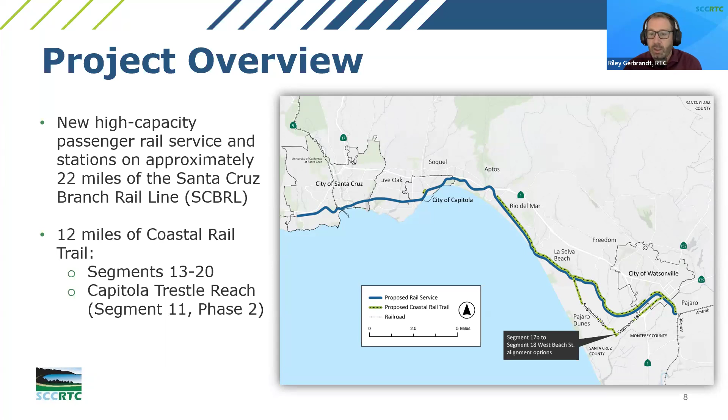And on your screen there is a project study area showing the alignment and study area of the passenger rail service in dark blue and the Coastal Rail Trail new segments in green with the dashed line. Next slide.

So far, we have completed 3 of the project milestones, and we're approaching milestone number 4, which is the draft concept report and preliminary cost estimates and next steps for project development. We have pushed out milestone 4 to have the main components complete in summer of 2025 and the final concept report adopted in the fall of 2025. Next slide.

And we wanted to start off tonight's webinar with a brief review of some of the key actions that have happened recently. One of the key actions that the project team and the commission has taken in recent months has been looking at the project funding outlook. In the March 20th item at the RTC Commission meeting, there was a commission action to align the zero emission passenger rail and trail project with the state rail plan, and I'll get to that in the next slide.

But funding for a capital project like the zero emission passenger rail project involves a combination of federal, state, and local funding sources. And generally, a project like this, almost to a T, will require multiple funding sources to be able to complete the environmental analysis, preliminary engineering, right-of-way, final engineering and construction, as well as fund the operations and maintenance of the project once complete.

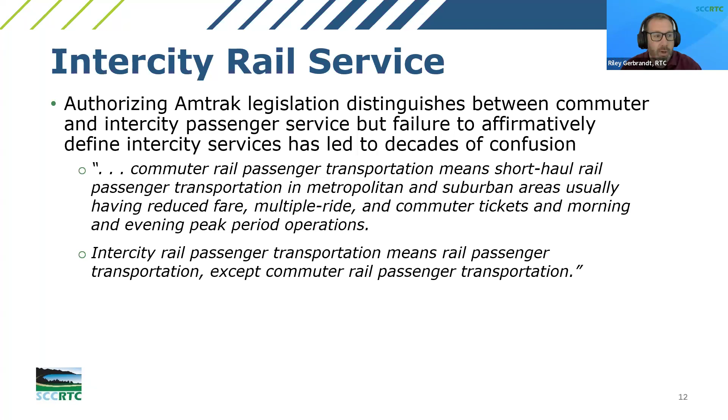In contrast, an intercity rail train is typically an express train with limited stops and comfortable carriages that serve longer distance travel. And next slide will provide a little bit more information on intercity rail service. So intercity rail is not just peak hour service, but service that provides regular service between cities, not at the local level that light rail provides. So for what it looks like in Santa Cruz County, let's boil it down to that.

So the key difference from light rail to intercity is mainly the frequency of those stations and the frequency of stopping at different stations covering the service area. So with intercity rail service, we're looking at on the order of maybe 6 to 8 stations on the Santa Cruz branch rail line, and having that service integrate with service that would be on the Union Pacific main line on the Central Coast Corridor. Whereas with a light rail service, you'd have more frequent stops.

What we would look to be doing, and we'll talk about it later in this presentation when I think Mark McLaren from the project manager HDR is going to touch on it, but our service would be focused on those main intercity rail stations, and then we wouldn't be stopping at all of the more frequent stations that we might have, like express or exception stops that would be seasonal or other type of service stations. Next slide.

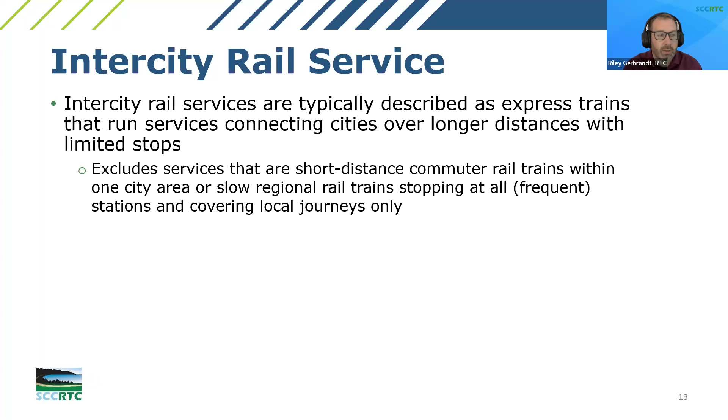Okay, and then what we've been doing since Milestone 3, in addition to the Commission's actions to align the passenger rail service development with the state rail plan by implementing intercity rail on the branch line, we've been continuing to progress the project activities. In Milestone 3, we heard feedback that identified several topics that needed further study and engineering analysis and work.

Those included the considerations for the Pajaro River Bridge in relation to current work and development of the Army Corps Flood Control Project in Watsonville and Pajaro, as well as operations and access to properties related to the Walker Street at-grade rail alignment in Watsonville, improvements in areas that are susceptible to sea level rise and coastal rail trail alignment work, particularly trail connections to community resources and existing trail networks.

Also, Aptos Village area bridge replacements, which we'll talk a little bit more about in subsequent slides tonight, and the alignment of the rail facility both near Highway 1 and the Cabrillo College area and in front of the boardwalk along Beach Street in Santa Cruz. Next slide.

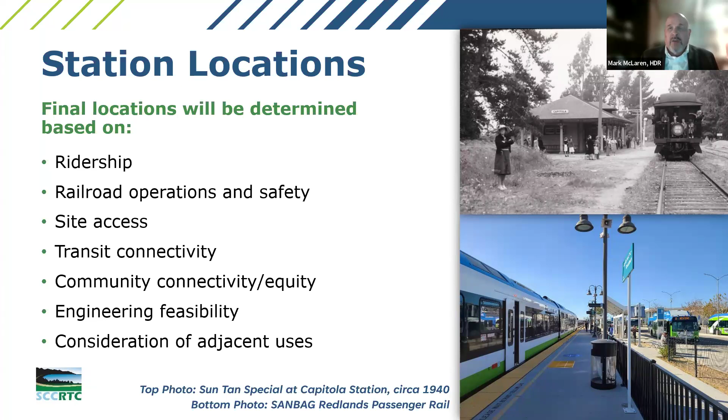So as we've gone through this conversation and we've been updating data in the regional travel model to look at the characteristics of the various station locations for ridership and understanding the changes that have occurred in travel volumes, as well as visitor activity and regular travel for work and school and those sorts of things in the model. We've gone through and prioritized the stations to a list that we believe is the appropriate starting point for evaluating the trade-offs in the various station locations and fine-tuning this list to a list that's reasonably sized for the length

of the system. The stops are frequent enough to serve important areas and connections for people to get on and off the system, depending on where they want to travel within Santa Cruz County or outside, but not being so frequent that it slows down the travel time, because the travel time along a corridor like this is ultimately one of the biggest considerations that people make, and the reliability of that travel time in terms of how they're going to choose to travel from one area to another.

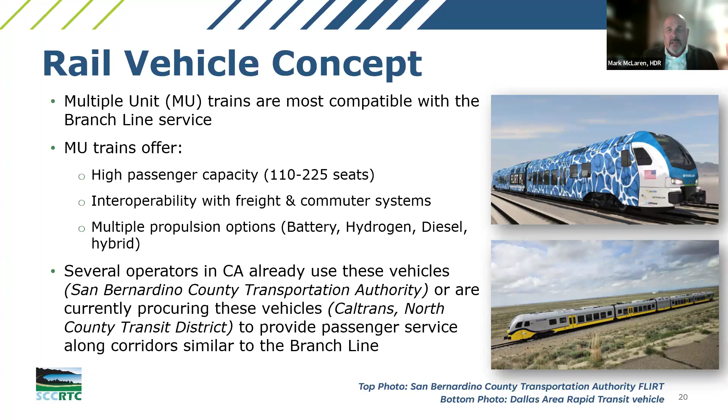Again, just kind of an update on the vehicle itself and the conversations that we've had. It is with the intent of having level boarding, which is always ideal, particularly for people traveling with bikes or mobility devices. It also makes the boarding and alighting of the train quicker because people aren't needing to stop and pause for a step and whatnot. As we talked about, it is hydrogen powered, and so it provides that zero emissions.

And there are also a number of different amenities that can be accommodated on board depending on the trip length and the way that the service is going to be used. And so in this case, when you think about traveling along this corridor, it's the opportunity, for example, to have bikes on the train, if that's something that's desirable to people, so that if you don't want to leave it at a station, there's different things that we can do with the configuration of it to really meet the needs of the community and what people want as a part of that travel opportunity.

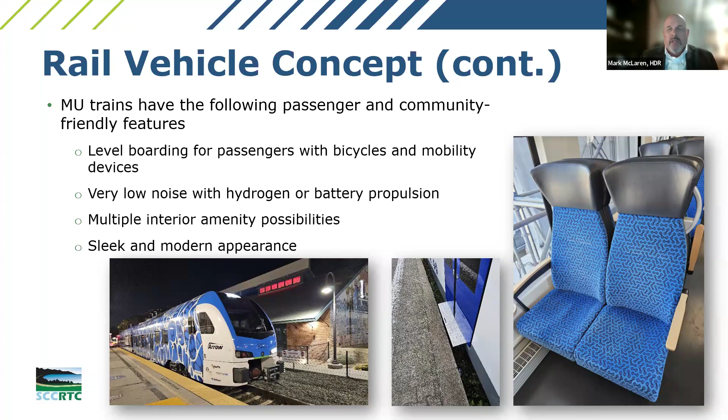to ensure that there's a safe area adjacent to the edge of the platform that can be identified with truncated domes to keep people away from the edge, and yet ample space within the platform itself for people with mobility devices and other needs to be able to travel safely back and forth across the platform with others who are using it at the same time.

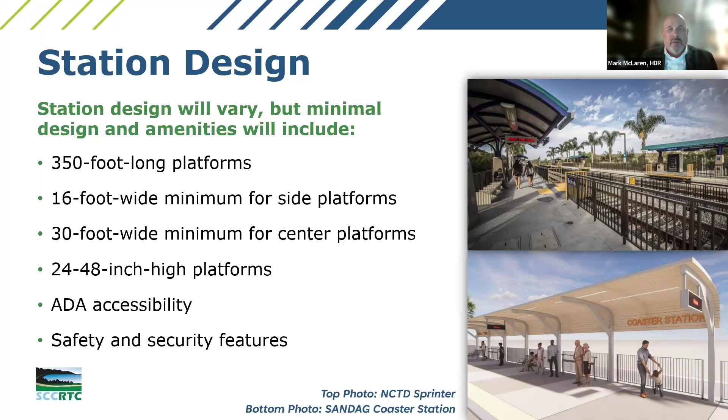Ultimately, the height of the platform is determined by the selection of the vehicle. Some of that is also dictated by other equipment that might share a corridor. And so that's a consideration we have to work to dovetail and make sure is consistent with the other services in the state rail plan. And then finally is making sure that the stations provide shade and other basic safety and security features for the benefit and the safety of passengers as they're traveling the corridor. Next slide.

Depending on the locations and what we know about the travel characteristics to and from those stations, as well as the adjacent land use, and how people might be accessing them, these are some of the other elements that might be provided at any or all of the locations, depending again on what the community wants to have provided in terms of basic amenities, but also the things that might be appropriate given specific locations.

So for example, a station that's in a downtown area that doesn't need to have its own parking and actually is an alternative for parking for people traveling into downtown may not have parking immediately adjacent to it. Another station that's a little further out, where people are more inclined to drive to the station to go into downtown or travel further in the state, may have parking provided as a part of it. And those are characteristics that were partially generated by not only you, the community's input to the project, but also what we know about the propensity for ridership to the various locations. Next slide.

So with that, I would like to turn this over to Chris O'Gara, who's our lead engineer on the design, to provide you with an update on where we are in the baseline definition of this conceptual alignment that we are carrying forward in the conversation, not only about ridership, but ultimately about costs and other things associated with the opportunity for the development of the project. Chris?

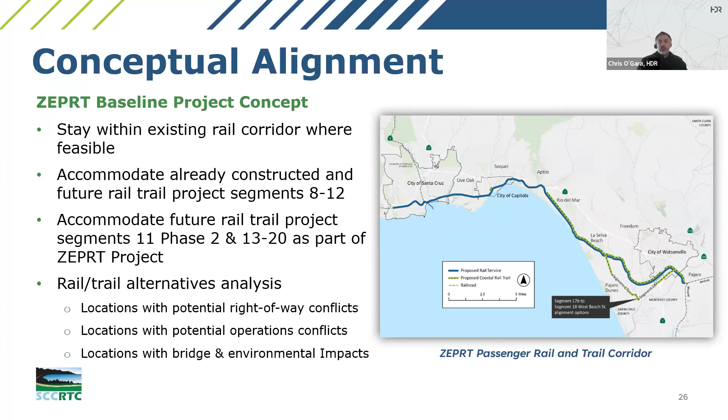Throughout this design process, it's sort of an iterative process, but we're conducting a rail trail alternatives analysis at some of the locations throughout the corridor. We've been considering potential right-of-way conflicts in the Capitola area, locations with potential operations conflicts in Watsonville along Walker Street and in Santa Cruz along Beach Street, and then locations with bridge and environmental impacts like the Seascape area along Sumner, Hidden Beach, and Bush Gulch area. So let's go to the next slide, please.

Okay, so some of the areas that we're talking about for the rail trail alternatives analysis: here on the screen, we have the Watsonville Beach Street Bike Trail. So the original concept is to study the rail trail inside the existing rail corridor. There's some constraints with operations due to the industry in that area and operating freight service for the existing sidings

and the people in that location. So we've discussed with the city of Watsonville potential realignment of the trail along Beach Street, up Beach Street towards the downtown area, running along Beach Street to Rodriguez Street, potentially down towards the Pajaro River on the levee, and then across and back into the railroad right-of-way.

In the Capitola area, we have a segment from 47th to around Thompson Avenue, the Jade Park area, with constrained right-of-way width and some encroachments. So we've looked at a couple different alternatives shown on the screen here. One out along Jade Park and along Brommer Street, back down to Thompson and into the railroad right-of-way, and then one along Nova Drive, and then across and kind of weaving through some of the streets back down to Thompson Avenue.

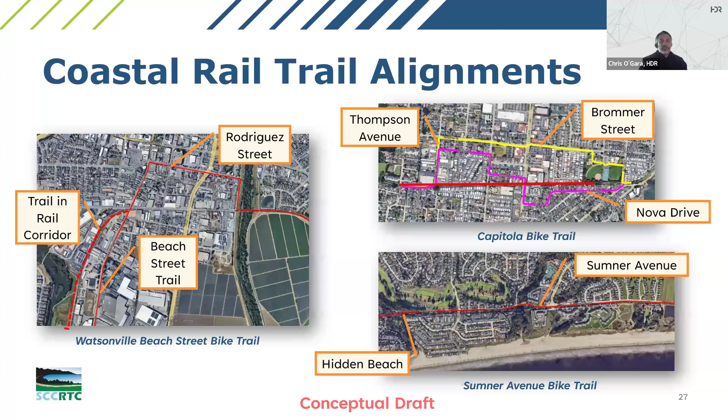La Selva and Manresa Bluffs, the area there is due to bluff erosion. We've considered an option to move the rail alignment slightly inland, considering the future bluff erosion. And then Capitola Bluffs, we're looking at options on how to keep the rail alignment through that corridor, considering bluff erosion. So the RTC will be conducting a separate climate resiliency study, and through that study, a lot of these options will sort of shake out, and we'll come up with ways to address these areas. So let's go to the next slide, please.

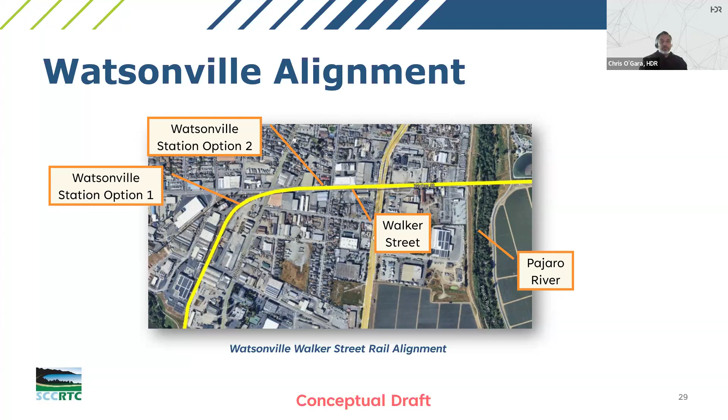In Aptos, the Aptos Village area, there's an ongoing parallel project to ours called the Auxiliary Lane and Bus on Shoulder project for Highway 1. That project is proposing to replace the two rail bridges, one on the north and one on the south side of Aptos. And in doing so, in order to create the required vertical clearance from the bottom of the bridge structure to the roadway finish grade, it's requiring the track top of rail to be raised considerably at both of these locations.

So we're looking at how to accommodate the Highway 1 rail bridge replacements and the track raise. Because of them, we're looking at how to accommodate the profile and the alignment geometry through downtown Aptos and the adjacent neighboring areas. Some of the things we're looking at are the bridges on either side of town, the roadway at Soquel, and the future Aptos station. Next slide, please.

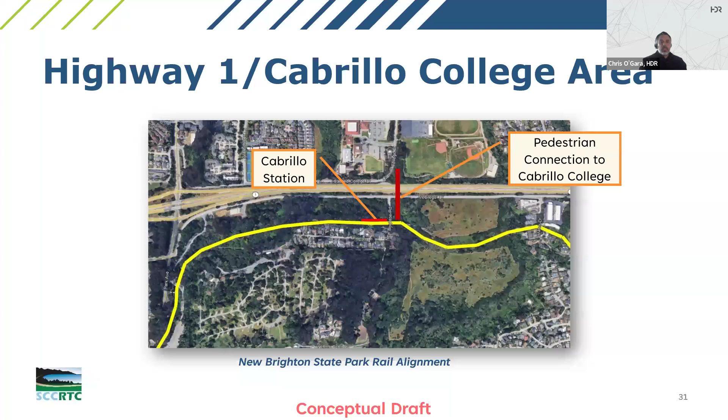The alignment for alternatives 3 and 4, we're looking at adjusting the bearing of the bridge over San Lorenzo River and shifting the track approximately 20 feet to, I think it's the east of the column of the log ride, out into Beach Street. And then the rail alignment will sort of hug that curb line trail location, existing trail location along Beach Street, where it runs west down towards Cliff, and then enters the same corridor that we have for alternatives 1 and 2, adjacent to the existing trail on the coastal side.

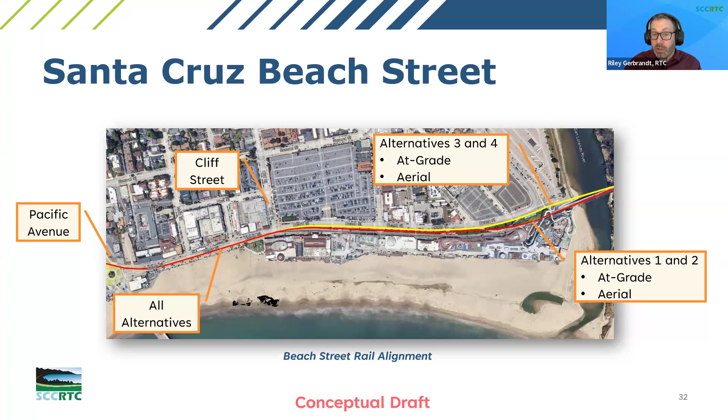That is correct. So the ZEPRT project is not replacing the railroad bridges that go over Highway 1 in Aptos. However, the highway auxiliary lane and bus on shoulder project is replacing those bridges to allow for the project along the highway to carry on underneath them. But in doing the bridge replacement, the design team for the highway project is actually elevating those bridges to meet clearance requirements or newer design guidance than the older bridges that are currently there.

So it's actually the profile changes to the alignment that have been raised, on the order of 1 to 2 feet. That is having these knock-on effects for some of the bridges over Soquel Drive and Valencia and Aptos Creek, which is what our project team is working to adjust the conceptual alignment to. Thank you, Riley.

Great. All right, and the next question asks, given what you've learned about the state rail plan and other regions' ongoing plans, what are some of the potential or likely destinations outside of Santa Cruz County that the train might serve in the future? Mark, are you able to answer this one for us?

Well, the benefit that this project has with the Union Pacific main line that passes through Pajaro is that main line gives you the ability to connect to things that take you all up and down the coast of California and the West Coast in general, right? At a minimum, when you look at the state rail plan and the connectivity, I think the key connection for this project, if you think of this as a one-seat ride, you get on the train in Santa Cruz or in Aptos, and you're not going to change trains again until you get to a certain destination. That point is most likely Gilroy.

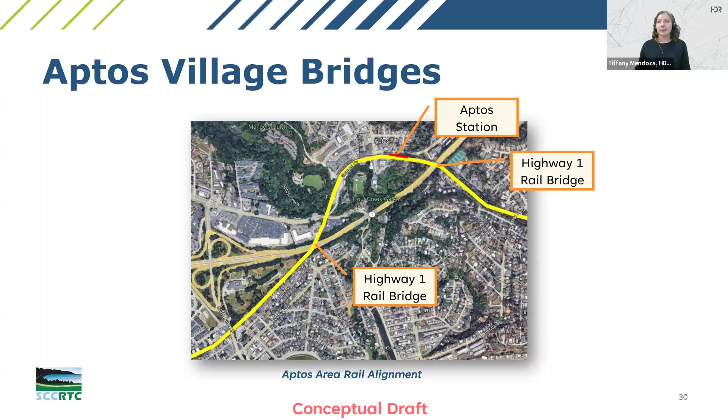And the intent here is right now in this concept, and again, based on looking at the information that we have, is that this Pajaro would be the end of the line. The station location, as Chris explained, that we're looking at in Watsonville is basically in the area downtown close to where the historic Watsonville station is. And that could move a little bit, and that's conversation that's ongoing with the city as it relates to some of their plans and where that station platform is best accommodated.